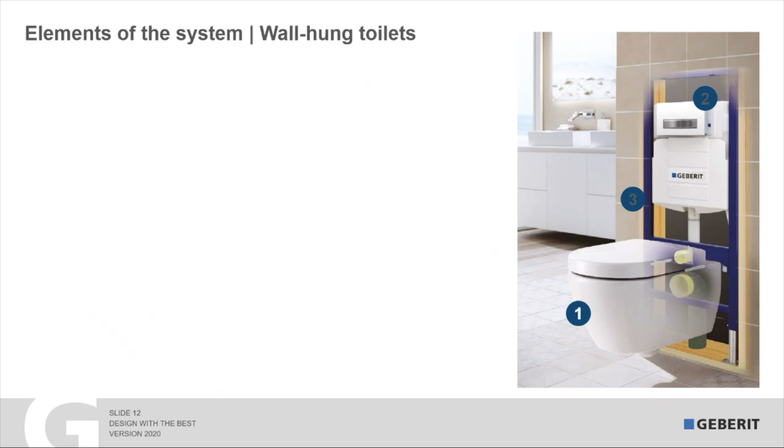So from the most beautiful, that's the wall-mounted toilet bowl, to the flush actuator plates themselves, which you actually use to flush the toilet, and then finally to the concealed tank and carrier frame, number 3 here, which is the piece behind the wall that I kept mentioning earlier. First, I'll start with wall-hung toilets.

In our marketplace, there are over 12 manufacturers and well over 100 wall-hung toilets that are compatible with these kind of systems in many shapes: round front, elongated, square shapes, different colors, skirted, unskirted, concealed mountings, and so on. From brands that I'm sure you're quite familiar with, including Kohler, Toto, and some European brands like Duravit, Laufen, Villeroy & Boch, and even DXV from American Standard.

These toilets are all back outlet, which means that the waste actually travels out of the fixture and into the wall, which is quite different than a floor-mounted toilet. Additionally, these kind of wall-hung toilets are very popular for adding bidet seats on top. Secondly, the second thing that you need to think about is related to the performance, and in general, wall-hung toilets have a good performance.

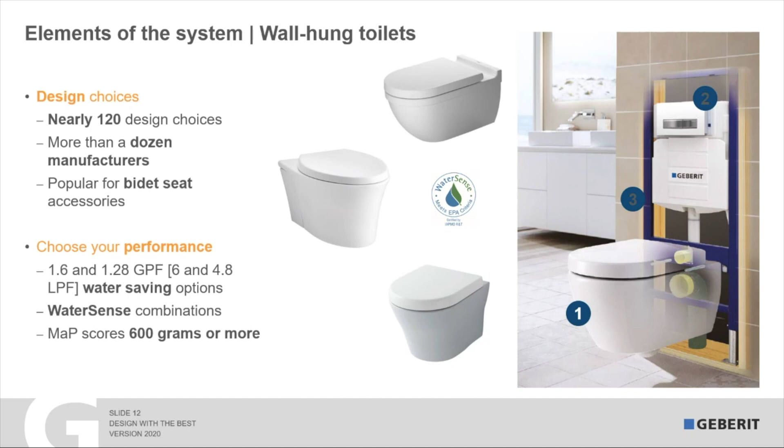You'll typically have choices for water savings between 1.6 and 1.28 gallons, as well as combinations that meet EPA WaterSense requirements for 20% reduction in water use. And finally, many of them also have a strong evacuation performance or flush performance with MAP scores of 600 grams or more. So beauty and performance are achieved even in these kind of systems.

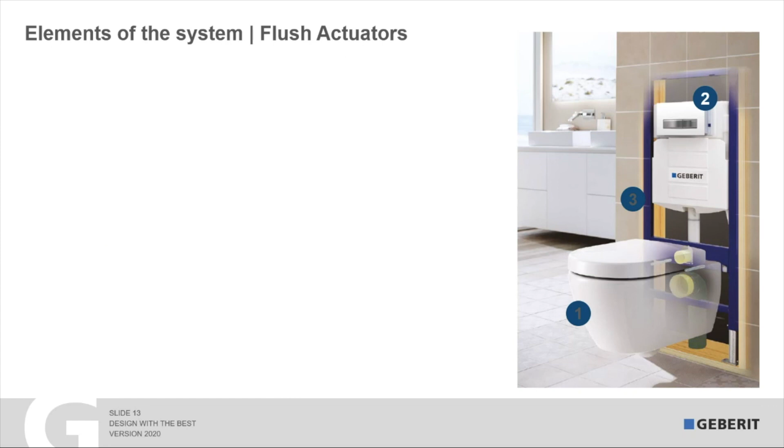The second component is the decorative flush actuator. And in this arena, there are plenty of choices to meet any design need. So there are actual plates themselves. There are also other choices that are a bit slimmer and smaller that can be mounted remotely. Even options for urinals, for example. You can see here designs for square, designs for round, all different finishes and colors. Materials including glass and stone, metal and plastics, and so on.

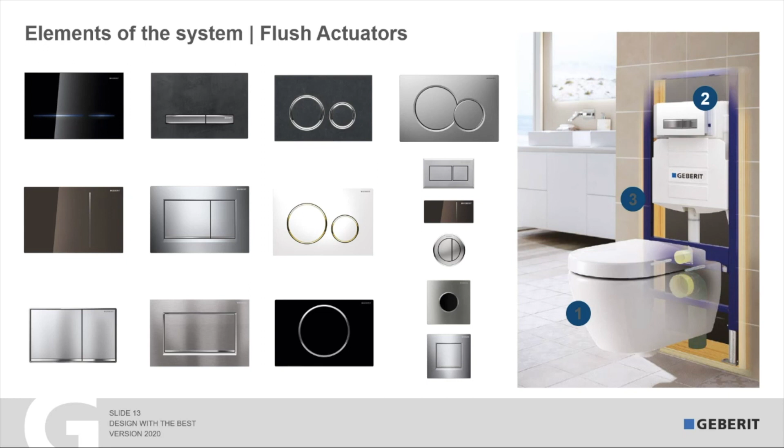One thing I should point out here is that between manufacturers, the flush actuators are not compatible. So pick the one you like and go for the design. The third and final component of any of these kind of systems is the concealed tank and carrier frame itself. And here are some of the basics.

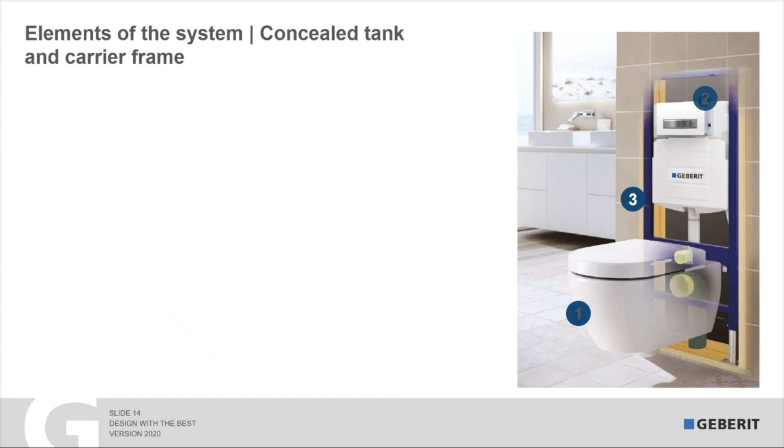These systems come in sort of two flavors: tanks that fit in 2x6 walls and frames that fit in 2x4 walls. And that's a great flexibility depending on your need. So you could have a renovation where you have a 2x4 wall only, and now there's a product that fits in there. The cool thing is these also work within wooden studs or even steel studs, and even in front of concrete or brick walls, which is a great solution for some older buildings, especially here in Chicago where I'm at, where there are rules related to what you can and can't do with historical buildings.

The other thing these frames allow you to do is to build different types of walls. I showed you earlier a pre-wall. You can also create freestanding walls with these kind of systems, and even any kind of crazy angled shapes can be used. From a wall cladding standpoint, these kind of systems accept every kind. So drywall, stone, tile, paneling, and different wall thickness depths.

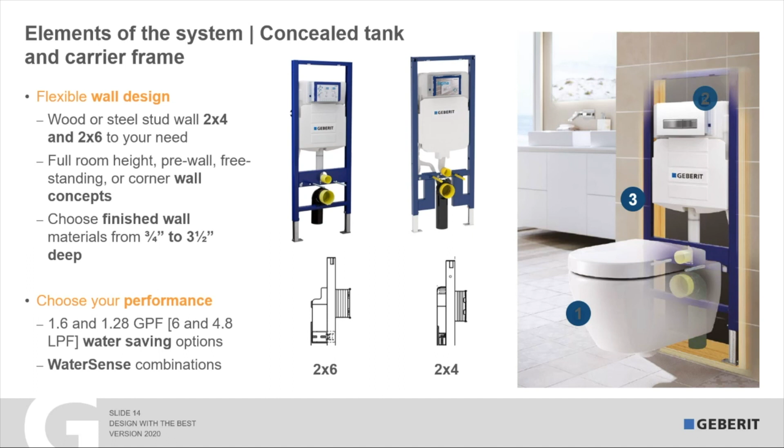The second thing to keep in mind is that you also have choice again in performance. So these systems typically come in two different flush water saving options, 1.6 and 1.28, and of course also in WaterSense combinations.

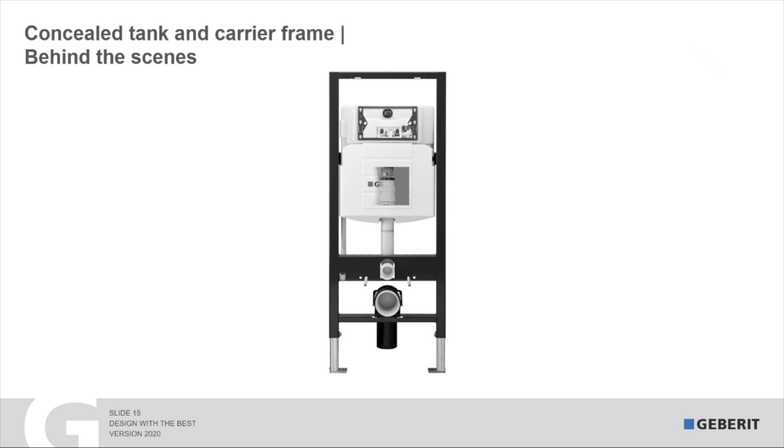Now let's take what I call a behind the scenes look at the carrier and tank frame itself. This kind of unusual thing, when I show it to contractors, they feel like it's something that NASA designed, but really at its heart, it's very simple, in a few key areas. So first is the support frame. This is steel. The number one question that I receive is, will it hold me? And I can tell you without a doubt, yes. In fact, it can hold almost 900 pounds without damage to the unit or to the wall. So this is a great benefit.

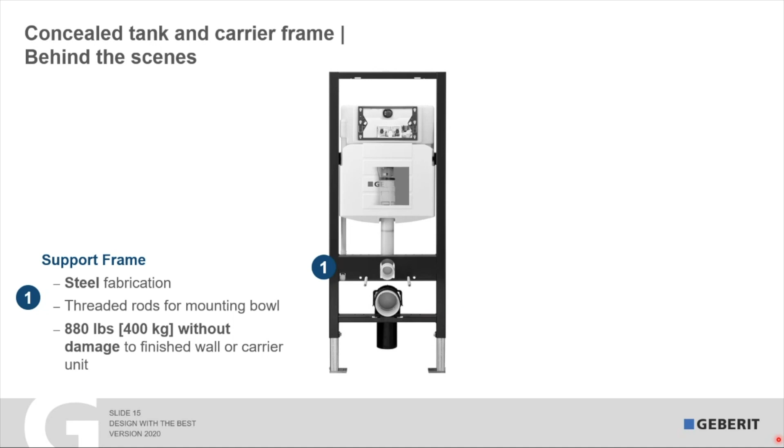Finally, these kind of systems use threaded rods that are screwed into the frame, as I'm showing here, to mount the bowl to. The second key feature of any kind of concealed installation system is the height adjustment. I mentioned this earlier in terms of the flexibility. So it's possible to raise and lower the frame, these legs, to accommodate seat heights as a user wants, or to meet ADA requirements, for example.

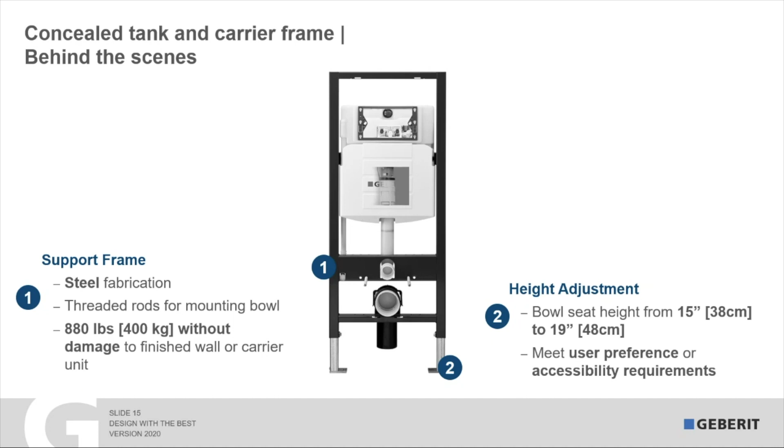The third major component of any system is the tank itself. These are generally tanks of an engineered plastic, and I should say it's much thicker than a milk bottle or a water bottle that you think of. This is really solid and strong, designed for these kind of applications. Additionally, all these tanks are insulated to prevent condensation forming on the outside, which you really don't want when it's behind the wall.

Diving deeper inside the tank, one of the cool things I think is this type of system doesn't have any chains or flappers. I know from my own experience, and probably you have the same, that this is really painful and causes a lot of heartache from time to time. So it uses a different system where the components are actually twisted and locked together, so that this type of issue doesn't happen.

Additionally, as I mentioned before, these types of systems can come in two different flush volume flavors, and most of them come dual flush ready, so that the installer doesn't have to do anything out of the box. They just install it. And then finally, as I mentioned earlier, the waste goes into the wall, and there's usually a fitting that comes with it to allow for that.

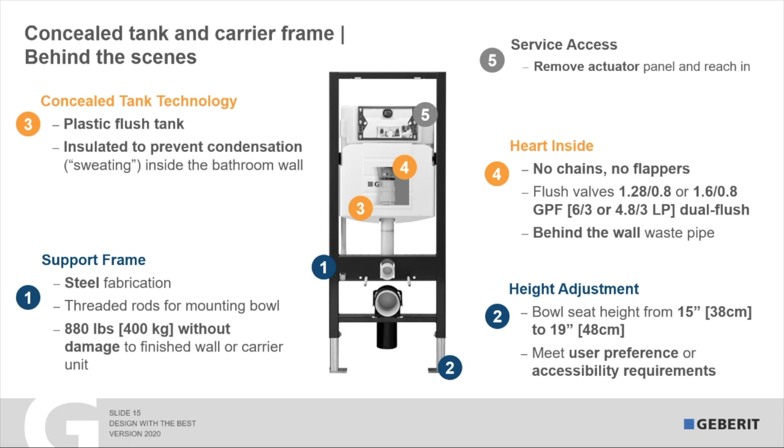And finally, the question, what do I do if I have to service it? And of course, the cool thing is, behind the actuator panel is an opening, and within that opening is access to all the internals. Because no, you don't need a sledgehammer, although I like to joke about that with people from time to time.

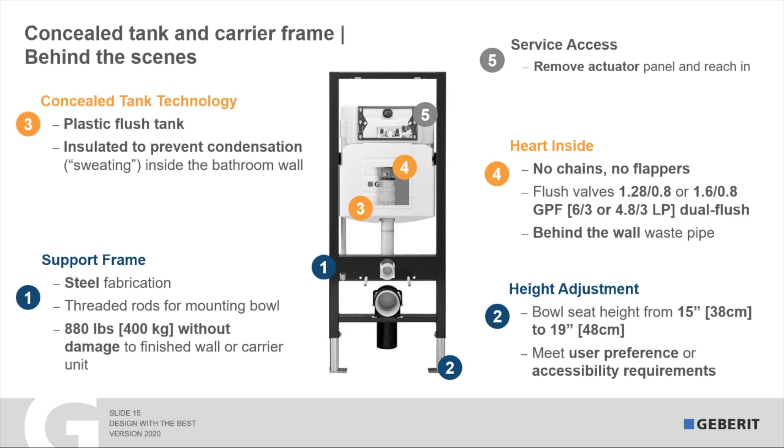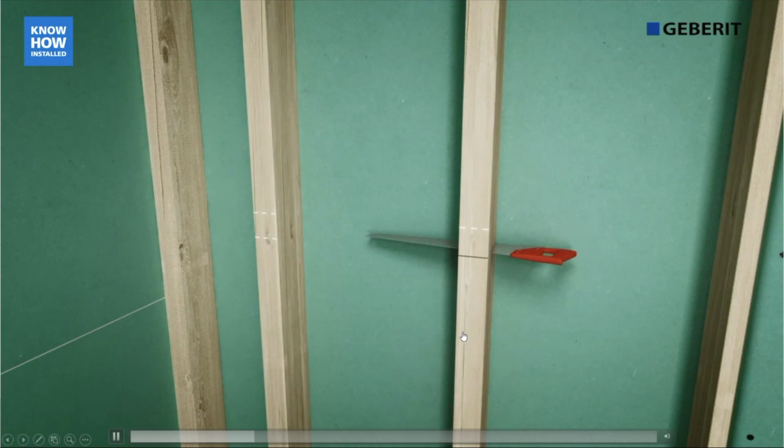Okay, so now that I've explained the system, I'm going to show you how it might be installed in a residential renovation in a 2x4, but these same basic steps will also apply across new construction as well. So in this first part, you see that the bowl is being set to the height. Then the studs are being prepared for mounting the frame portion itself. As I mentioned earlier, this can be done with 2x4 or 2x6 studs, both in wood and metal.

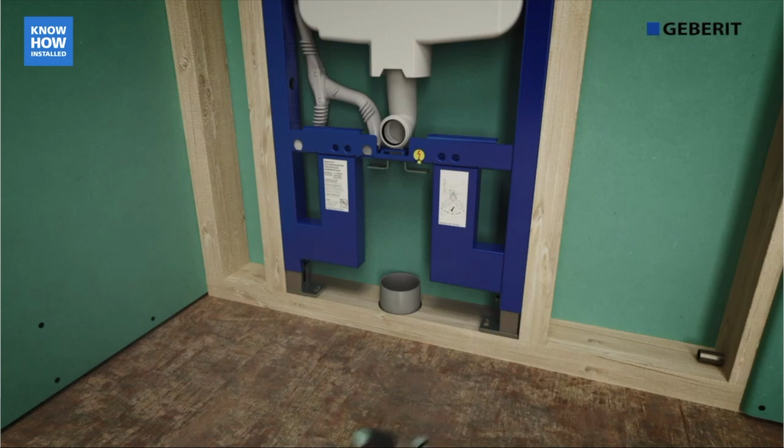The frame is adjusted to the height and now attached to the studs themselves. This can be done with lag screws, for example, directly into the wood, or also with through bolts, or in the case of steel studs, directly into the blue frame itself. So that's kind of neat and interesting.

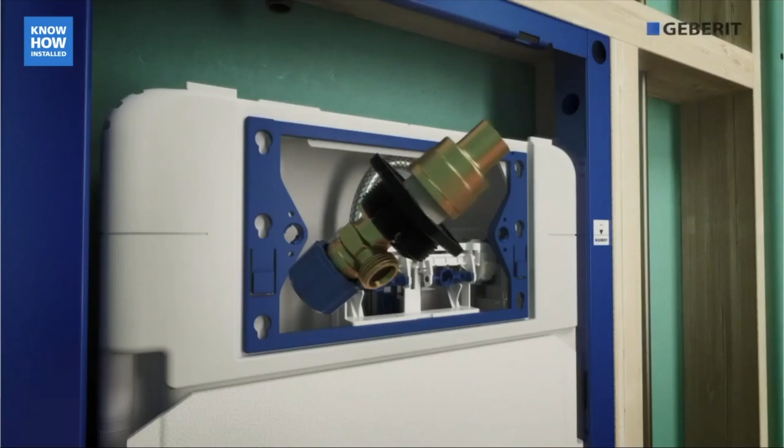Next, we attach the waste outlet to the main drainage system. It's a 3-inch drainage, the 1/2-inch supply. The supply is then attached to the fill valve, and it's ready to go at the rough-in. After the wall cladding is on, the plumber will come back, install the toilet and the flush actuator, test it, and all set to go. It's really as simple as that. Those are the basic steps. Not so bad, is it?

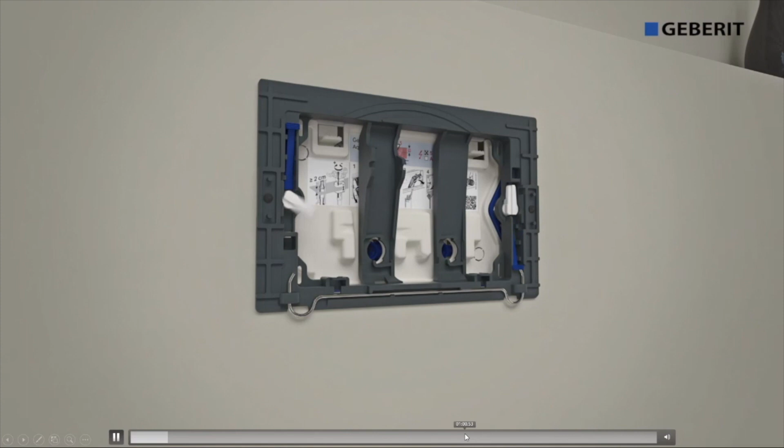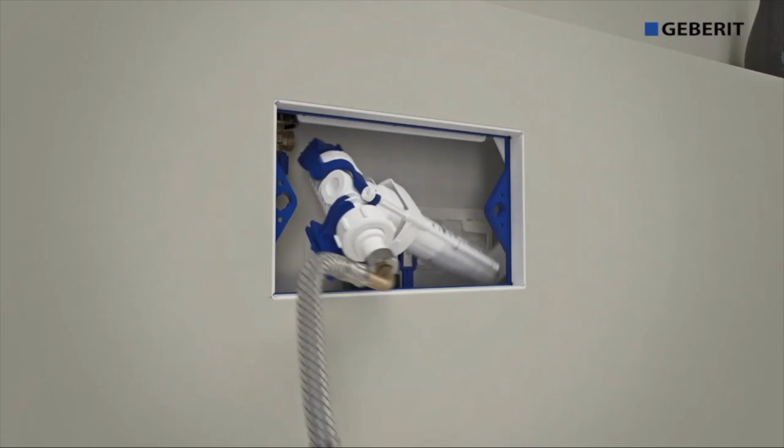But then, of course, now that's installed, that's great. It looks easy to install, but what about the service? I know, Ron, that you mentioned that I can go behind the actuator plate and reach in, but what does that look like? Let me show you. So first, remove the actuator plate. This is pretty typical. And remove some of the internals. Disconnect the filling valve. That can be removed for service. And then next comes the flushing valve itself.

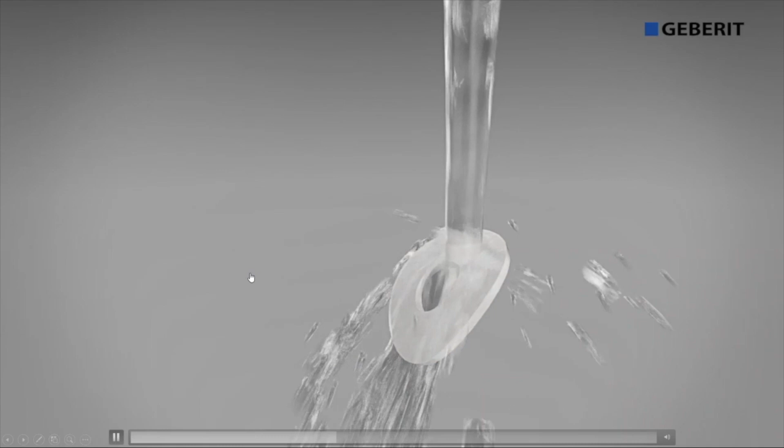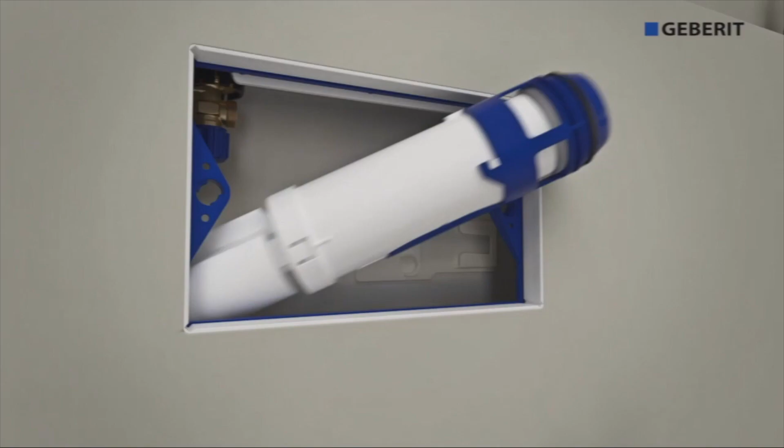So the gasket can be washed off or can be replaced. It's very simple. It's not a flapper that's attached to a chain, as I mentioned earlier. If possible, you can reuse it, or replace it. And then the flush valve is set back into the tank. And now we can see how the service of the fill valve goes. This is very along similar lines. Try washing it first and reinstalling it. And replacement parts for systems such as these are available through most plumbing wholesalers.

And that's how the servicing is done. I was once challenged by a salesman to see how fast I could go through and remove all the components, and my best time was around 13 seconds. So it is really as easy as it shows there. At this point, I'd like to pause for a few minutes and see if there are any questions that have come in.

Okay, hi Ron, it's Jamie here with the marketing side. We do have a couple of questions. I will go through the first one. The first one was, what is the warranty? Oh, that's a great question. I'm actually going to answer that later on. It varies from manufacturer to manufacturer, but I will talk specifically about Geberit in the next few minutes. Okay, you have time for another one?

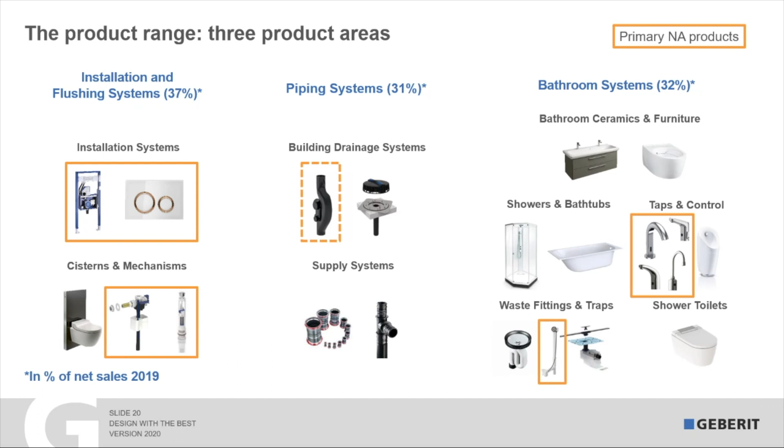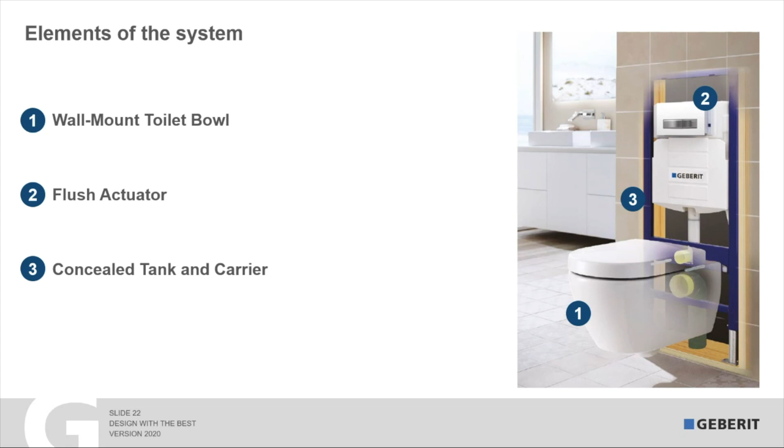So we'll go back to the same basic elements. I'll go through each of these: the bowl, flush actuator, and concealed tank. The thing I want to tell you about the bowls is, although in North America Geberit doesn't have a bowl of our own, all those dozen manufacturers and all those bowls I talked about earlier are still available. This also goes to the question that came up. And here's why I say that. At Geberit, we use an open platform. We don't discriminate on the basis of bowl brand. And that includes other companies that have concealed installation systems and bowls.

And while some companies generally only test their own tank and bowl, but not other bowls, here at Geberit, we feel like this is limiting design possibilities, and that's not fair to the community. But to ensure that, we test all the Geberit tanks and bowls together at a third-party testing agency.

This is the only way we can protect you and end users and ensure performance. And further, only those that pass are used and marketed by Geberit in our communications and in our trainings. So I really feel strongly about that.

What it says to me then is that now also, in addition, you don't have to sacrifice design or performance because of the fact that we do this testing, and that there are 2 water savings versions available depending on your locale. It really opens up all possibilities. You don't have to choose between design or performance.

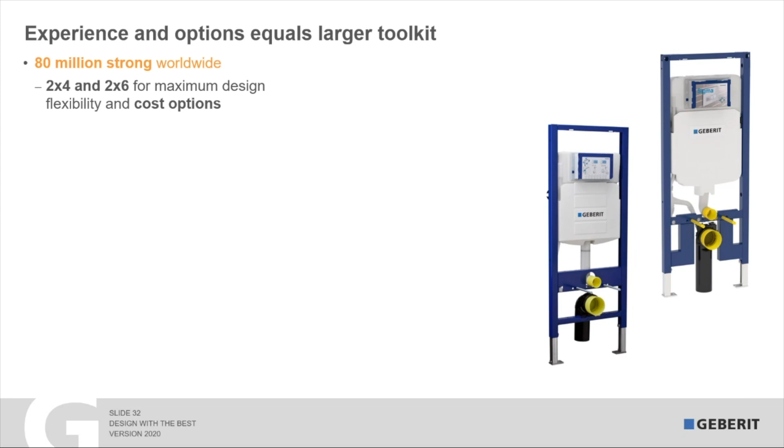Secondly, not all manufacturers have this pre-wall solution, Omega solution, like we have. For top mounts, this is great as a problem solver below windows, for example, or even mirrors. This actually came up in a project in New York recently, where the design has a mirror that runs directly above, and with the height of a tank and carrier like this, we wouldn't be able to achieve that.

So the second area where Geberit has a strong position is in the performance. As I mentioned earlier, there are 1.6 and even 1.28 full flush water savings options, and those 100 WaterSense combinations that I spoke about earlier.

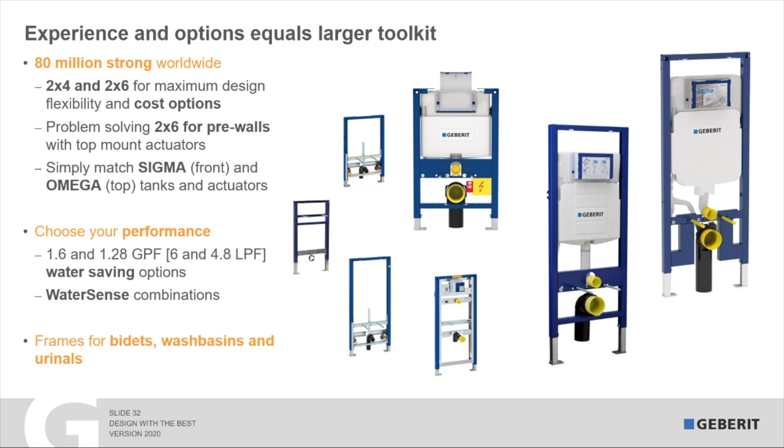And then finally, Geberit is most unique in the number and type of the frames which are available. So this includes bidets, wash basins, and urinals, and this is not in every program range of all manufacturers. So with this toolkit, architects and designers, you guys can do almost anything, in my opinion, with these set of products.

When we talk specifically about the Geberit concealed tank and frame, I want to focus on a few things, in addition to what you learned already earlier. And this is what we mean when we talk about know-how installed. First of all, the frame itself is 16 gauge structural steel tubing, which is actually produced in our own plant, and is painted blue and powder coated for 2 specific reasons. One is the corrosion resistance, but 2 is the plumber comfort.

In fact, we at Geberit did a survey of plumbers with different coatings, and asked them which coating they liked the best. And they came back with the powder coat. And the reason for that was it's the warmest to the touch in the wintertime versus chrome plating or galvanizing or some other process. So we really have the installer in mind in that case.

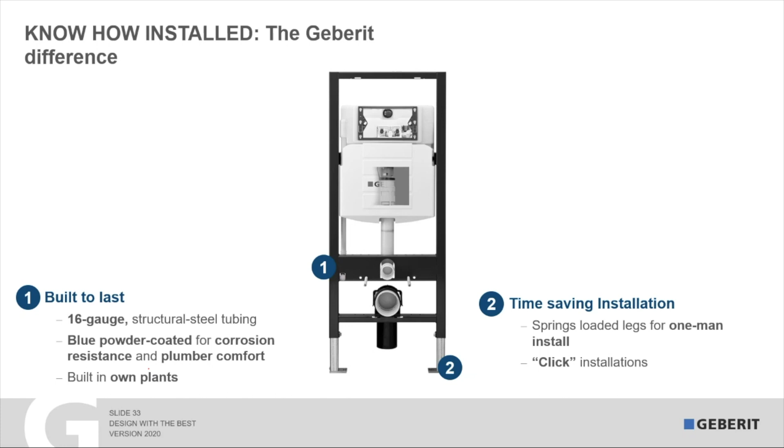The second area is the time savings. This is quite unique as well, in that the legs themselves are spring loaded, which allows for a one-man installation. This means that legs don't fall out when you're trying to adjust them. And finally, most of the connections are done with a click, so during installation, you hear the click when the component has been installed in the right location.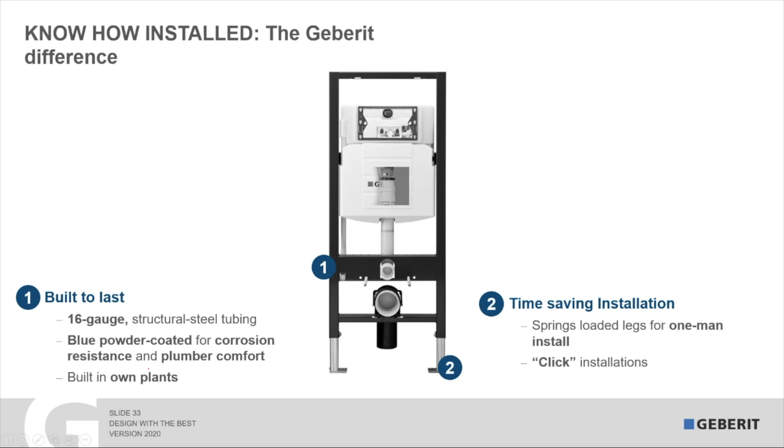Third, this question goes to answer the earlier question. What about the Geberit? What about the tank? Geberit uses a blow molded tank, all one piece. And blow molding is the process that's used to make water bottles and so on. So there aren't any seams in it. It's like taking some molten plastic and blowing it up like a balloon. This HDPE, high density polyethylene, is also the material that car gas tanks are made out of.

Geberit was the first to use this technology, and I told you the story, since 50 years. So that's really incredible. All the tanks are individually leak tested before they leave the plant. If they don't pass, then they get ground up, and that's the cool thing about recycling plastics. You just dump them in, melt it, and then you try again.

Additionally, the tank is reinforced inside, and if we were together in the real world, I would jump up and down on the tank and show you just how strong it is, because it really is that robust.

Finally, Geberit backs the product with a lifetime warranty against defects. It's really important to me at least, especially, that if something goes in the wall, it has to last a lifetime. You shouldn't have to think about it or worry about it once it's covered up and behind everything.

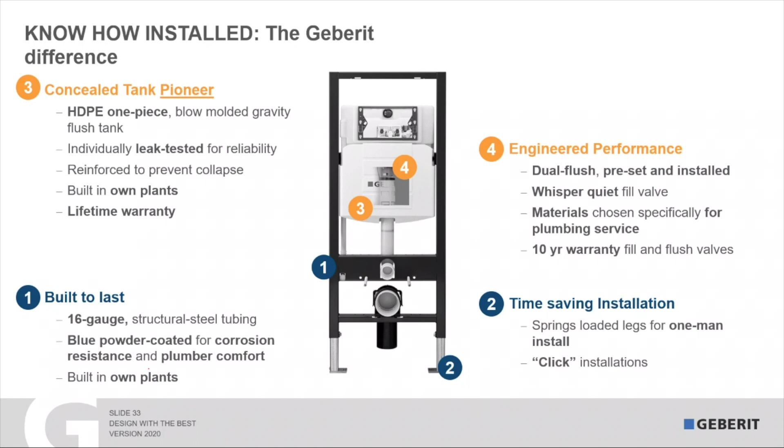Along those same lines, the fill and flush valves carry a 10-year warranty. Again, we know that products with rubberized seals will have to be serviced at some point, but if they do, let's make it as infrequent as possible. So at Geberit, we back those valves with a 10-year warranty. In addition, the fill valve is designed to be really quiet. Whisper quiet is actually the best description. I can't think of a better one.

Then finally, the Geberit advantage is tool-free maintenance. This means that all of the servicing I showed you earlier, in that short video, can be done without tools. So access to the supply stop, the fill valves, and the flush valves can be done without tools.

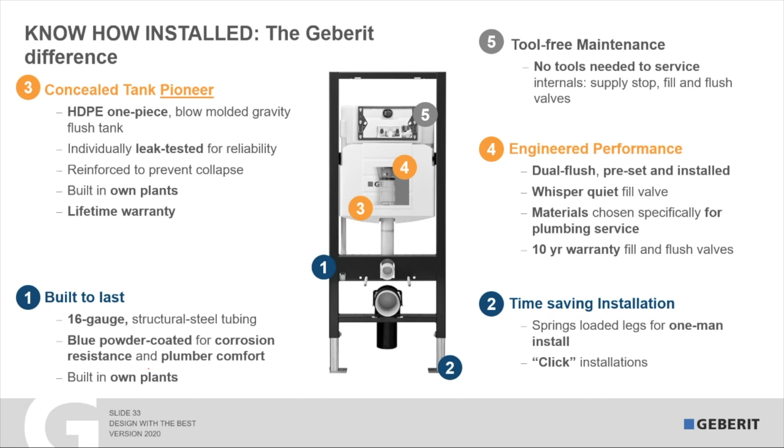Finally, I want to give you a few notes about planning. Until now, I focused on the Geberit difference with respect to the product, but to me, it doesn't stop there. This is what separates Geberit. It's about the service and tools and support that you have with us.

The first comes in the area of wall planning. You should know that actuator selection can be a determining factor regarding the finished wall thickness, the construction, and the material. So this is important when considering the flush-mounted actuators, for example, in the 60 series families, and for remote push buttons.

The second thing is that during the installation, the wallboard and the blue frame of the tank and carrier must be together and flush with the studs. Without this, it can create a spongy feeling when someone's sitting on the bowl, and over time it will damage the wallboard and tiles. So this is really important.

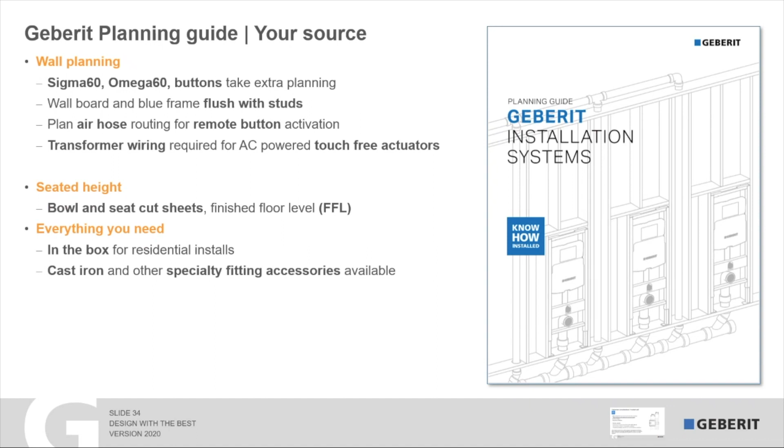And then finally, a note about the drain, waste, and venting. First and foremost, the same rules that apply to floor-mounted toilets apply to wall-hung toilets and concealed installation systems. So follow local codes. There's no difference there, so that's a great help.

and down the line. When the waste fitting is not set to this orientation, the flush just kind of sits around in the bowl. The bowl doesn't evacuate, the water sits there, and so does everything else. So this is very important to keep in mind, to pass on to the installers and in planning.

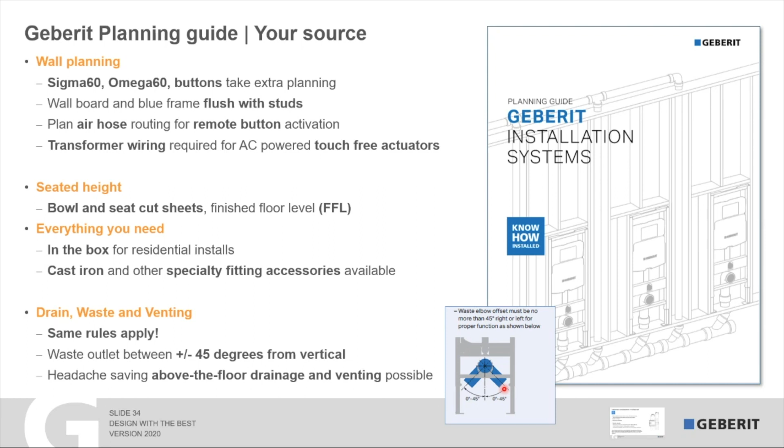But one of the nice things that this allows is that you can actually use this to develop plumbing above the floor, which in, let's say, multi-story buildings is a considerable advantage. More cores is more expense. And even in many residential applications, breaking through the floor plate is really an undesirable situation.

Okay, so now before we wrap up, let me just review the benefits of concealed installation systems. Of course, I talked about space gaining and space savings to make it more spacious. I talked about the look, both modern and traditional. Choices are endless. Easy to clean with skirted toilets and components hidden behind the wall.

No need to bend over. Flexibility in terms of fixture location, fixture type, and fixture height. And then finally, the water savings. And lastly, I leave you with this. When you combine all those things together, this is what you can achieve. The choice is yours.